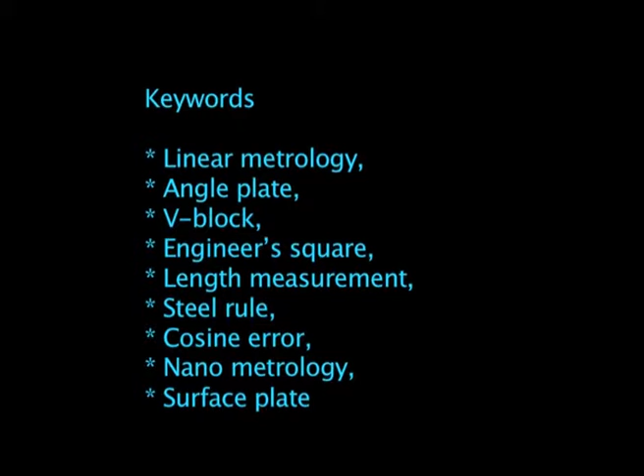I welcome you for the module 2 lecture 1 of this series. In module 2 we will be discussing linear metrology - what it is, and the various instruments used in linear metrology, those things we will be studying.

Before we start linear metrology, let us try to understand the general care of measuring instruments - when the instruments are in use, how to take care of them, and when they are in storage for a long time, how to store them so that they are protected from the environment.

We will also study about classification of measuring instruments - how they are classified based upon the type of physical quantity that is measured, based upon whether they have graduated scales or no graduations, and then depending upon precision and accuracy, how they are classified.

And very recently nanotechnology has evolved, and what type of metrological instruments are used in nanometrology, that also we will be studying. Finally, we will be dealing with various kinds of linear measuring instruments.

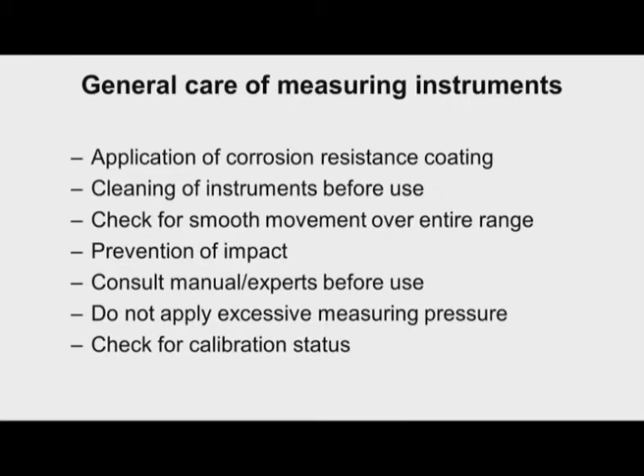It is very essential that whenever we use the instruments, we should not over-pressurize or apply excessive pressure, so that the moving jaws, anvils, or plungers will not impinge on the work surfaces.

For example, if you over-pressurize the thimble of the micrometer, the spindle will enter into the workpiece and indentation marks will occur. So it may damage the workpiece as well as damage the spindle.

Such things should be avoided, and it is very essential that we have a proper sense of feeling - we should feel before we apply pressure. It is always better if we have instruments wherein the application of excessive pressure is avoided. If such a mechanism is there, we should try to have such instruments.

We should always check for calibration status, whether calibration is required for that instrument, and when it is required. Whenever calibration is required, we have to arrange for sending it for the calibration purpose.

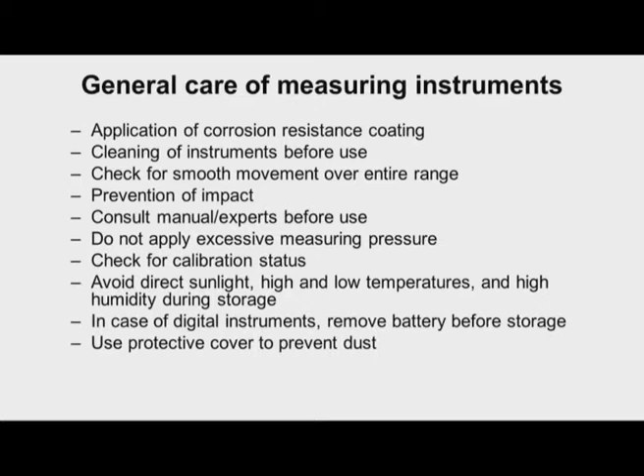It is also important to avoid direct sunlight, high and low temperatures, and high humidity during the storage of measuring instruments. In case of digital instruments, it is necessary to remove the battery before storage if we are not using battery operated instruments for a longer duration. Wherever possible, we should use a protective cover on the instruments to prevent dust settling on them.

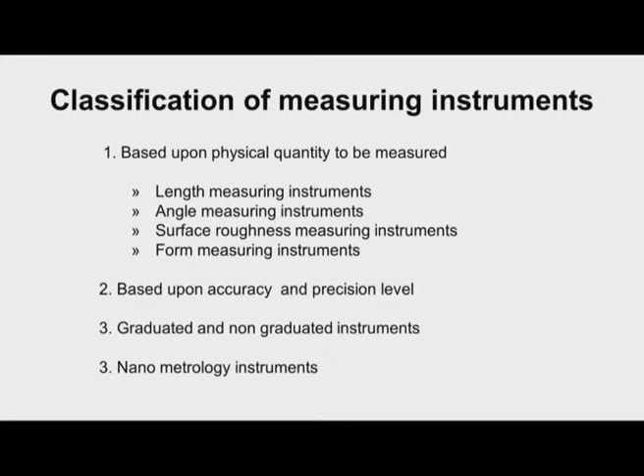Now let us try to understand how measuring instruments are classified. They are classified based upon the physical quantity to be measured. For example, length measurement involves measuring the length of the workpiece, breadth, depth, or diameter of a hole. This represents a single dimension quantity, so when we use instruments for single dimension measurement, we say they are length measuring instruments.

Then, if the instruments are used for measuring angles, we say they are angle measuring instruments. For example, a bevel protractor is an example of an angle measuring instrument.

Then there are instruments meant for measuring the surface roughness of machined surfaces, for example, the surface tester used to measure surface roughness.

In some cases, we use instruments for measurement of the form of the workpiece, whether there is any out of roundness, or some drum shape or barrel shape present. If we use the instrument to measure such things, we say they are form measuring instruments.

Based upon accuracy and precision, we can also classify the instruments as very accurate instruments and not so accurate instruments. Similarly, very precise instruments and not so precise instruments.

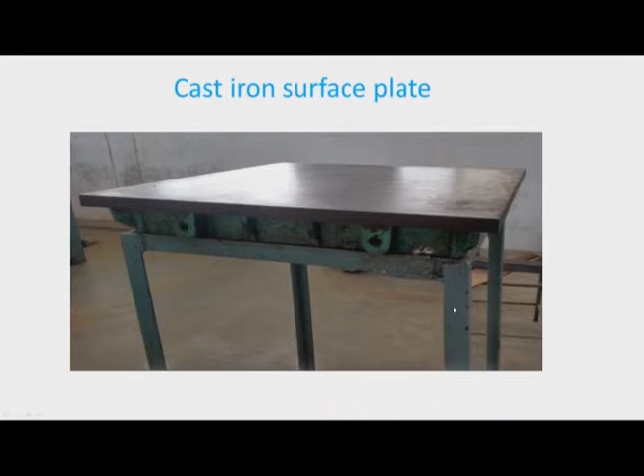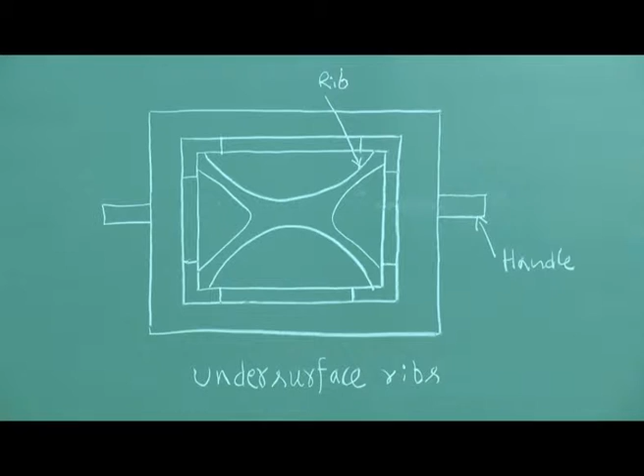Now, over to the blackboard, we can see the under surface of the cast iron surface plate. There will be a lot of ribbing provided so that the surface plate will not bend due to the weight of the instruments kept on it.

Grade 2 is normally used in the workshop for regular inspection of workpieces, whereas grade 0 is used in the calibration and standards room for calibration purposes. Cast iron surface plates are made as per IS 2285 2003 standard.

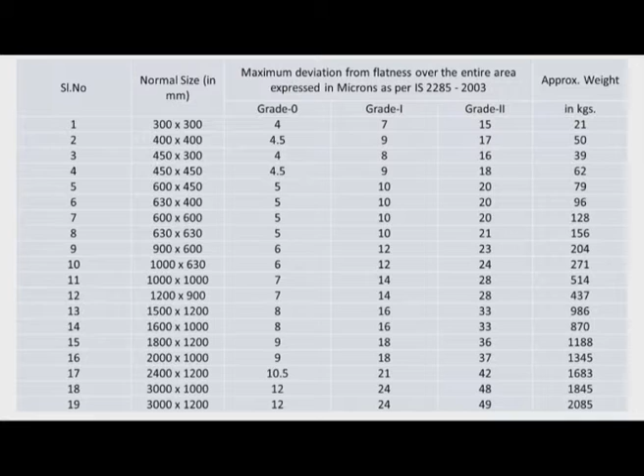Now, these surface plates are made out of cast iron, and they are also available in glass as well as granite. The advantage of glass and granite is they are not subjected to corrosion, whereas cast iron plate is subjected to corrosion if not properly protected. So, whenever the surface plates are not in use, it is necessary that they should be covered with a wooden cover.

Another advantage of glass and granite surface plate is, when a workpiece falls on the surface plate, in case of glass and granite plate, no burr is formed. A dent will be formed which will not affect the measurement process, whereas in the case of cast iron, burrs will be formed which may affect the measurement process. We may get some measurement error due to the burr formed.

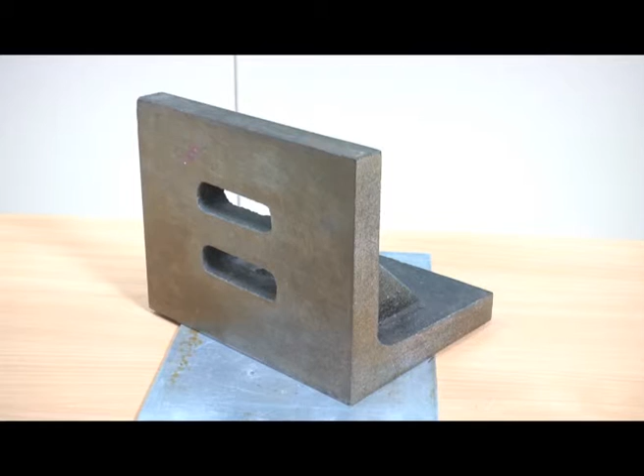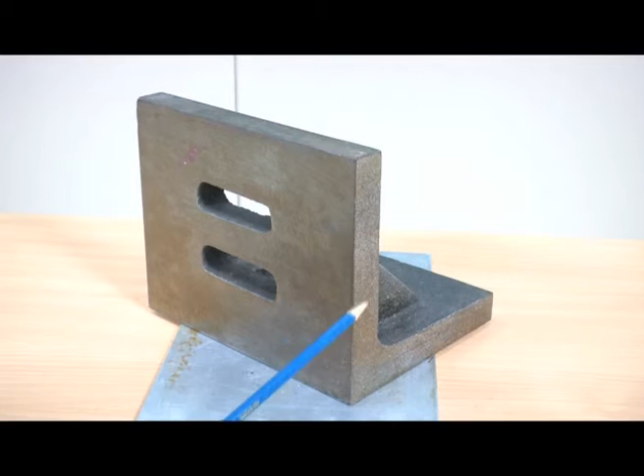Now, we have some other accessories like the angle plate. I am showing an angle plate, which is a very important accessory used along with the surface plate. You can see the shape of the angle plate, it is L shaped, and this is the bottom working surface, and this surface is again a working surface which is perpendicular to the bottom surface.

So, this is the length of the angle plate, this is the height of the angle plate, and this is the breadth of the angle plate. Now, it is very essential that this bottom surface and this surface should be square. IS 2554 1963 specifies the various sizes and the accuracies needed for angle plates.

For example, if the size is 125 by 75 by 100, the flatness of this working surface should not exceed 5 micrometer. Similarly, this working surface, for the same size of 125 by 75 by 100 millimeter, the flatness of this bottom surface should not exceed 5 micrometer.

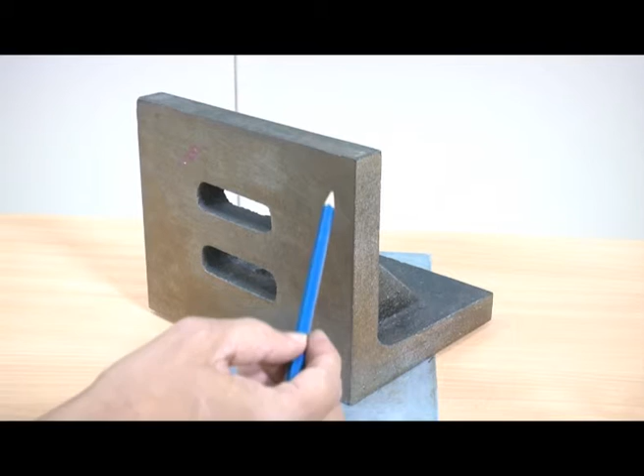Then the squareness of this working surface with the bottom surface: for a height of 100 millimeter, the squareness of this surface with the bottom surface should not exceed 10 micrometer. And then for the same size, the parallelism of opposite faces, meaning this surface and this surface, should not exceed 13 micrometers. Now, we can just see the other side of the angle plate.

Now, we can see there is a rib between the vertical plate and the horizontal plate, so that the angle plate will be rigid. We can also see 3 slots here, and we have 2 horizontal slots used for clamping of workpieces.

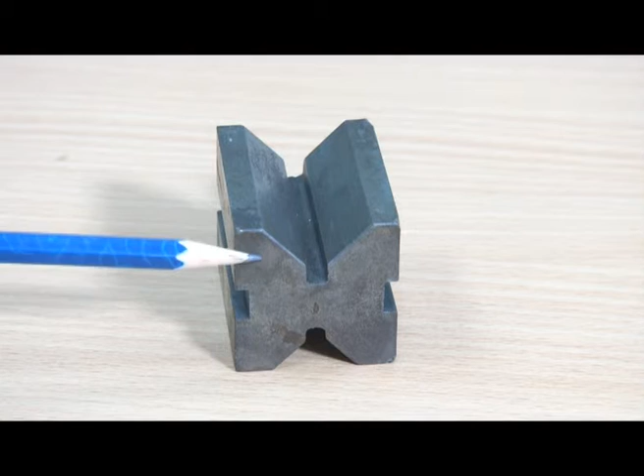And then we have the V block, which is another accessory used for the measurement process. Now, we can see a cast iron V block, we can see the V channel, and then we have a V channel on both sides. So, this is the top surface, this is the side working surface, and this is the end surface. It is necessary that all these surfaces are square to each other.

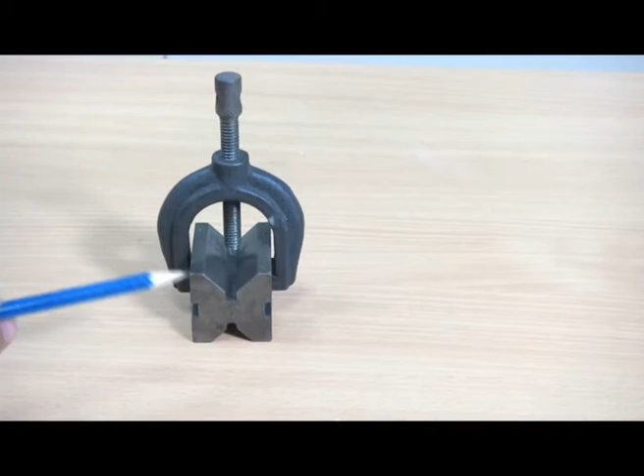Now, these V blocks are used for clamping cylindrical objects and for marking the center of cylindrical objects. We can always clamp the workpieces using this type of clamp. So, in between the V channel and the screw, we can place the cylindrical object and clamp it.

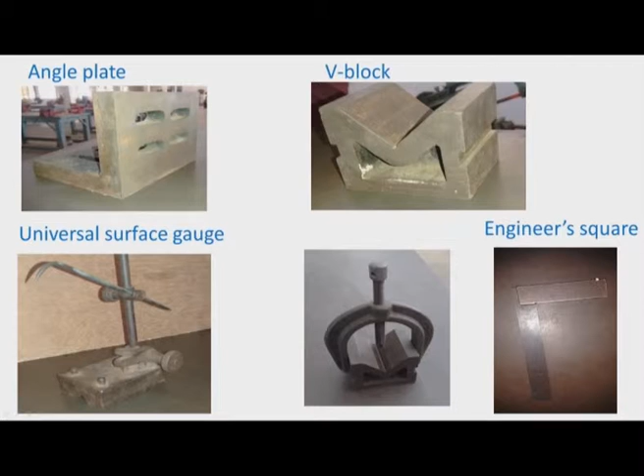So we have another accessory known as engineer's square. This is the engineer's square. We have the bottom surface and we have the vertical surface here. This is used to check squareness of the workpieces.

These are made as per Indian standard 2103 1972, and different grades are available: A grade, B grade and C grade, depending upon the type of work, whether it is used in the machine shop or in the standards room. We need to select the appropriate grade. It is very essential that this surface and the bottom surface should be square to each other.

Now, these engineer squares are used to check squareness of the workpieces. Let us assume that this is the workpiece and I want to check whether this surface is square with the datum surface. For that we have to keep the engineer square like this.

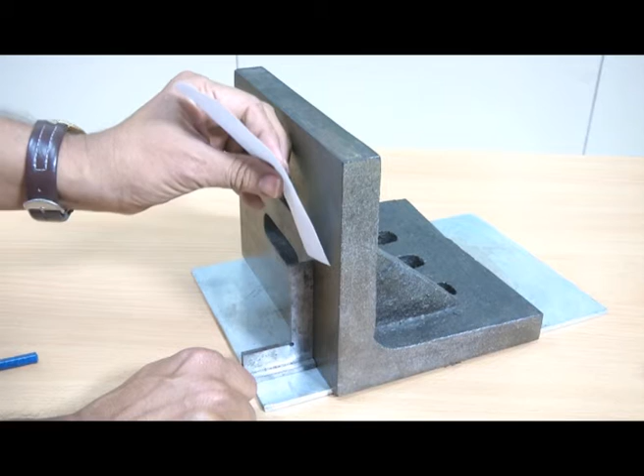Then we have to take a thin paper and insert it between the engineer square and the workpiece. If it enters, it indicates that there is some error. If it does not enter, then it indicates that squareness is okay. Now, it is not entering, so the squareness of the workpiece is okay.

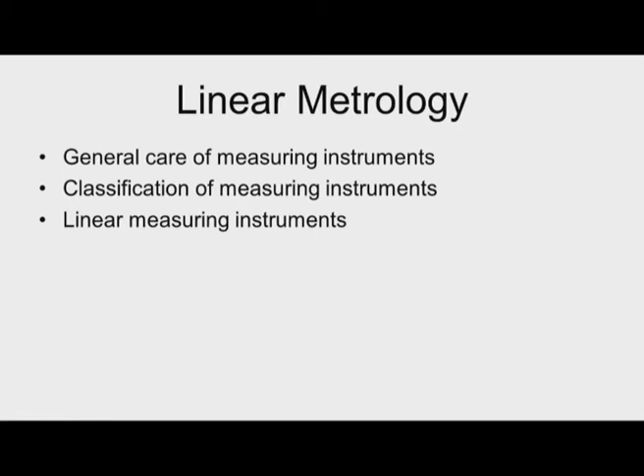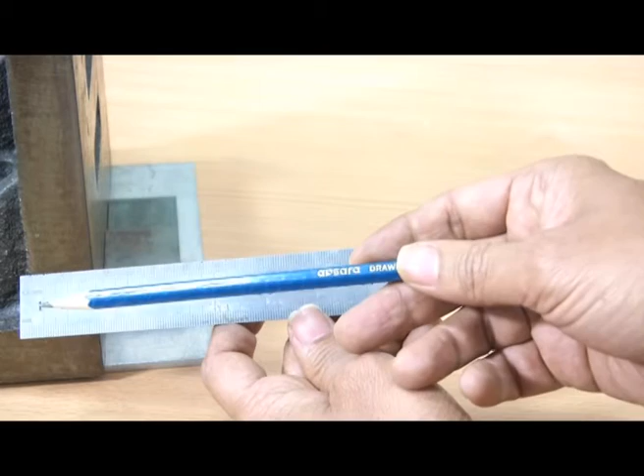Now, we have a steel rule, which is the most common instrument for measurement of linear dimensions. This steel rule is made out of stainless steel, and then it is hardened. The range of this scale starts from 0 to 20 centimeters. Coming to the resolution, up to 10 centimeters we have a very fine resolution of 0.5 millimeter.

From 10 centimeter to 20 centimeter we have a resolution of 1 millimeter. Depending upon the accuracy required, we can use the portion wherein resolution is 1 millimeter, or if finer accuracy is required, we can use 0 to 10 wherein resolution is 0.5 millimeter. Graduations are marked on both the edges, and available on both sides also, so any side we can use.

Before using this steel rule, it is very essential to check whether this end is proper or not. Sometimes this may be worn out; in that case, we should not use this edge. We should start from one marking instead, and then we should not forget to deduct this 1 centimeter from the reading obtained.

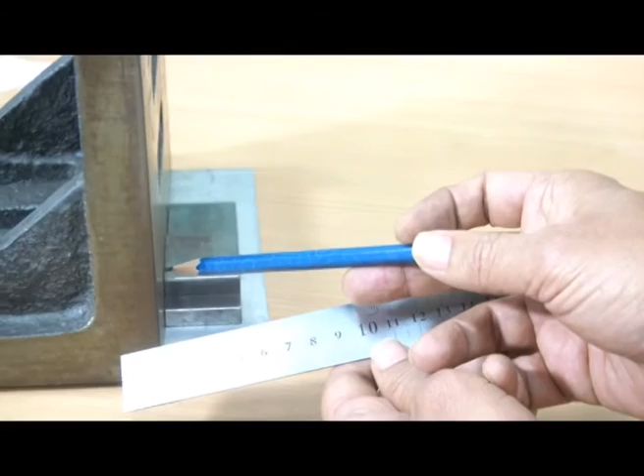Now I will show how to use this to measure the length of a workpiece. You can see here I have a workpiece, butt against the angle plate. Now I am keeping this steel rule on the workpiece.

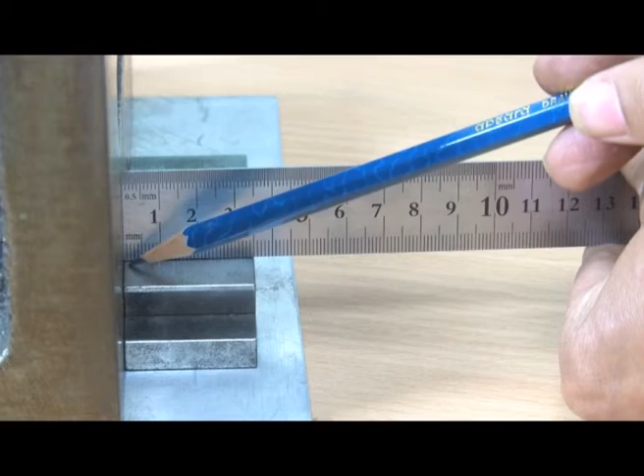And now we can read. This edge is the reference wherein the reading is 0, and then on the other side we have the measurement point. So now the reading is 35 millimeter, that means the length of this workpiece is 35 millimeter.

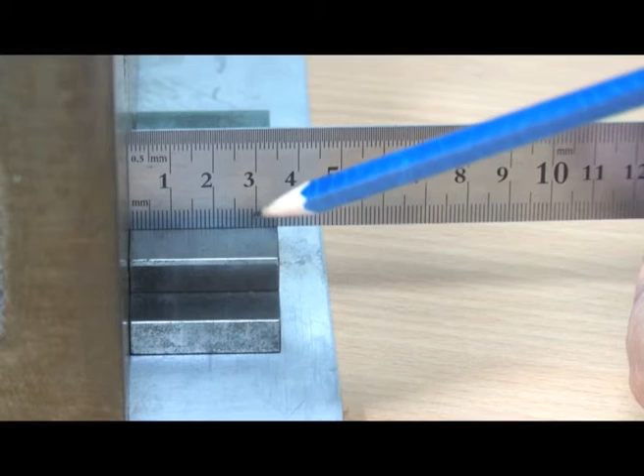Now, it is very essential to read the steel rule normal to the steel rule, otherwise parallax error may creep in.

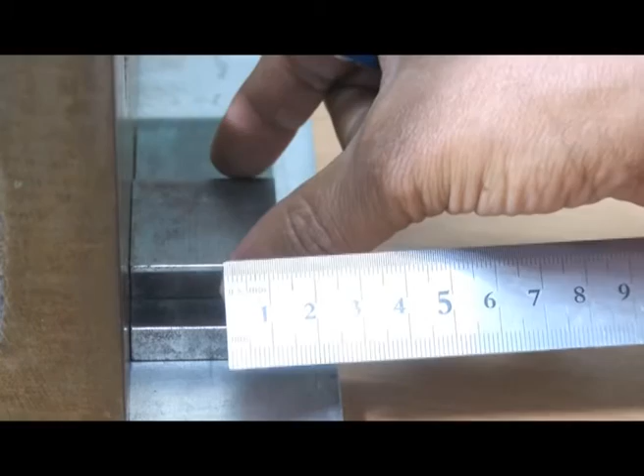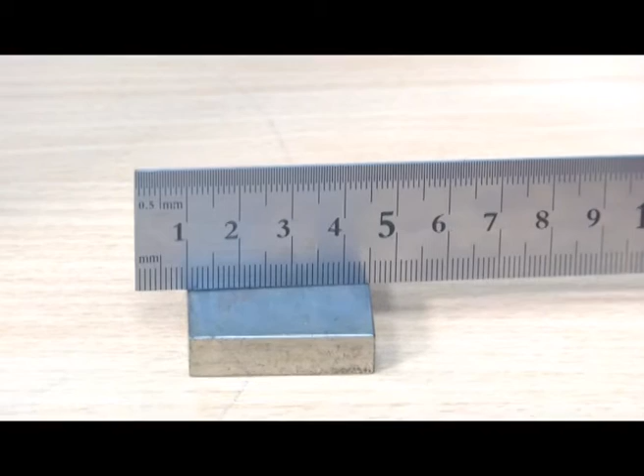Now, in case this edge is worn out, how to use this steel rule? I will just show how to use the steel rule when the edge is worn out. Now you can see number 1 is coinciding with one edge of the workpiece.

This is the reference point, and then on the other side we have 45. Now you can see the observation is not normal to the scale, so there is some parallax error. The reading, the difference between the measurement point and reference point, is 35 millimeter.

Now I will just show how the cosine error creeps in. You can see we have the workpiece, and we need to measure the length of the workpiece. For that I am using this steel rule. One end of the steel rule is coinciding with this edge, so this is the reference point, and this is the measurement point. Now it is reading 40 millimeter.

Now, the steel rule is not parallel to the physical quantity to be measured, that is length.

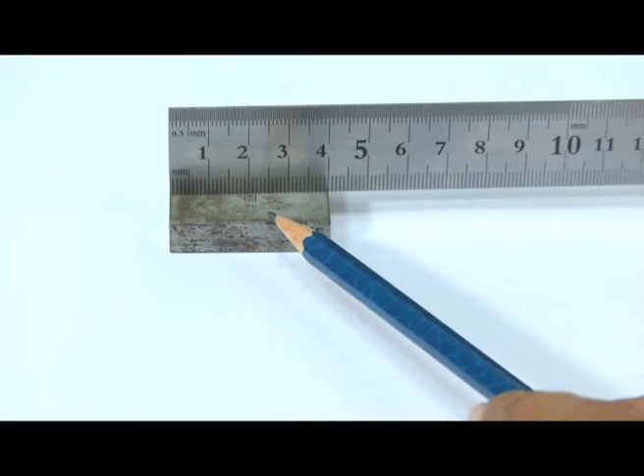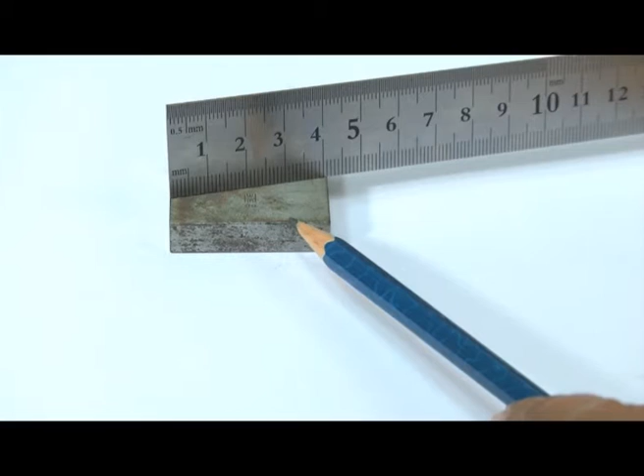Now, when there is some angle like this, you can see the steel rule is not parallel to the physical quantity to be measured. So, this is the length of the workpiece, but we have placed the steel rule at some angle theta. Because of this there will be cosine error. So, actually when we measure we get now this is around 41 millimeter, it is showing 41 millimeter, whereas the actual length will be L cos theta.

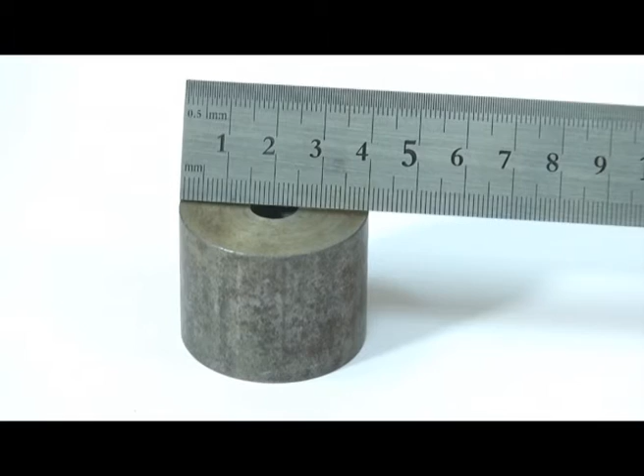This cosine error can be avoided by keeping the steel rule parallel to the quantity to be measured like this. Now, I am explaining how to use a steel rule for outside diameter measurement.

Now, I am keeping one edge of the steel rule at this place. So, this is the reference point, and then I am slowly adjusting the steel rule so that I am measuring the diameter, not the chord.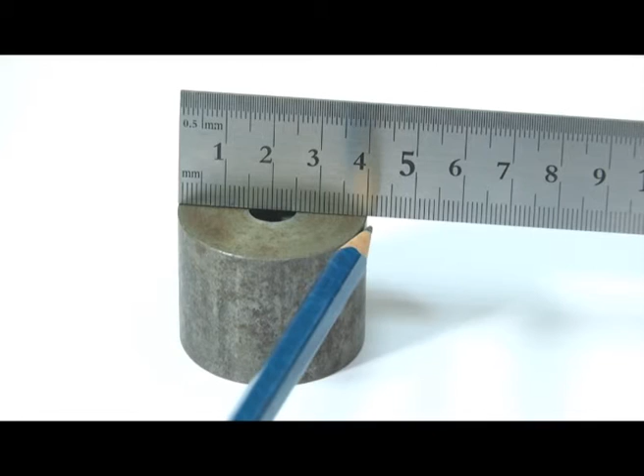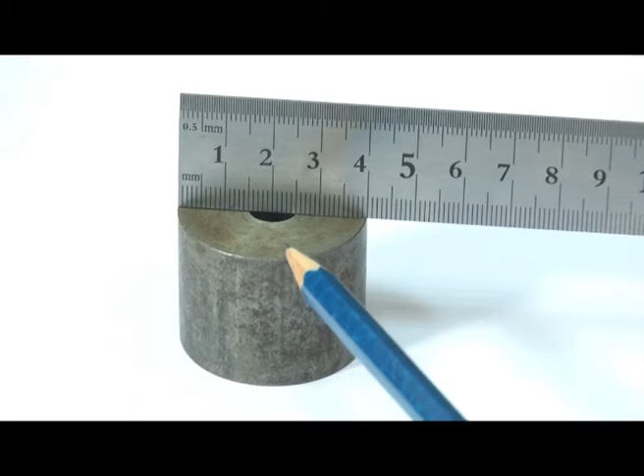Now the measurement point is at this place and it is showing 4 centimeter. So, the diameter of the workpiece is 40 millimeter. So, this is an example for direct measurement wherein we can directly get the size of the physical quantity and there is no need to have any calculations.

Now, I am showing a few non-graduated instruments. This one is a spring caliper, outside spring caliper for measurement of outside dimensions. This is inside caliper for measuring inside dimensions. These are the legs of the caliper, and we have a screw and a nut, and this is the spring which provides necessary tension to the legs.

Similarly, we have 2 legs here for the inside caliper and a screw, a knurled nut. By rotating this, we can adjust the distance between these 2 measuring points. Now, these edges are hardened to nearly 600 Vickers hardness, so that they do not wear much.

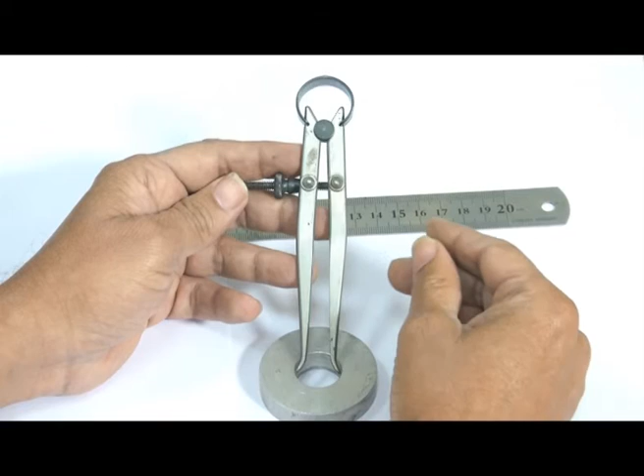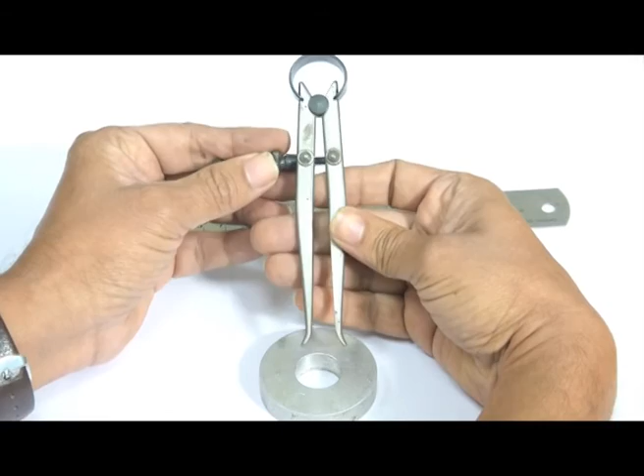Now, let me demonstrate how we can use an inside caliper for measurement of inside diameter. We have to insert both legs of the caliper inside the hole, and then adjust the screw till we get the diameter. Slowly we have to rock the inside caliper till we get the minimum dimension.

If we take the dimension in this inclined position, there are chances of getting cosine error. So, we should get the minimum dimension, and always the instrument should be perpendicular to the workpiece like this. Now, I am getting the minimum dimension.

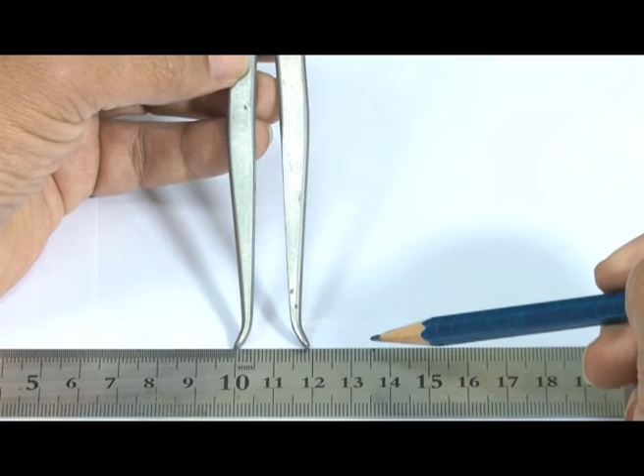Now, we have to remove the instrument from the workpiece, and then transfer this distance onto the steel rule. We can see one point is coinciding with the graduation mark 10, and graduation mark 12 is coinciding with this point. So, the distance between these two is 20 millimeter. So, the diameter of the hole is 20 millimeter.

Now, let me explain how this outside spring caliper is used to get the diameter of the workpiece. We have to keep the workpiece on the surface plate and hold the caliper like this. We have to rotate the nut so that two tips come in contact with the workpiece.

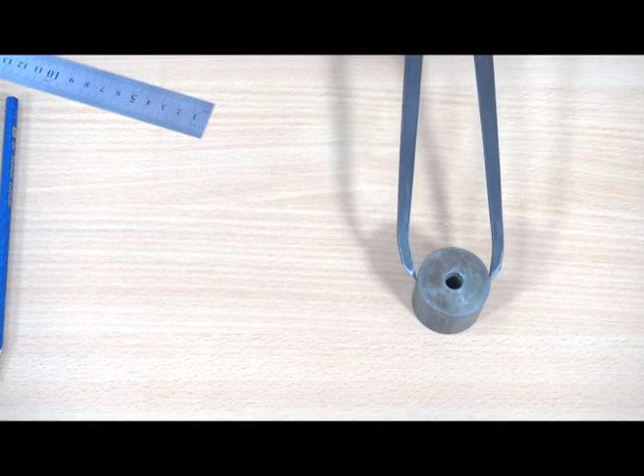Now, we should take care that the two tips are in contact at the diameter, and now we have to remove this spring caliper from the workpiece, and then use the steel rule.

Now we can see this tip is in contact with the edge of the steel rule, and this is the reference point and this is the measurement point. Now, we can take the reading. It is giving 40 millimeter, that means the diameter of the workpiece is 40 millimeter.

Since the spring calipers do not have their own graduated scale, they are used only for transferring the distances.

Now, let me conclude this session. In this session, we learnt about general care of the measuring instruments, and how we can classify the measuring instruments. Also, we learnt about linear measuring instruments, wherein we discussed different kinds of accessories like surface plate, angle plate, and engineer's square, and then we studied some of the linear measuring instruments, that is steel rule, how to use steel rule for length measurement, how to use steel rule for inside diameter measurement and outside diameter measurement, and how to use spring caliper for transferring the distance from the object to the steel rule.